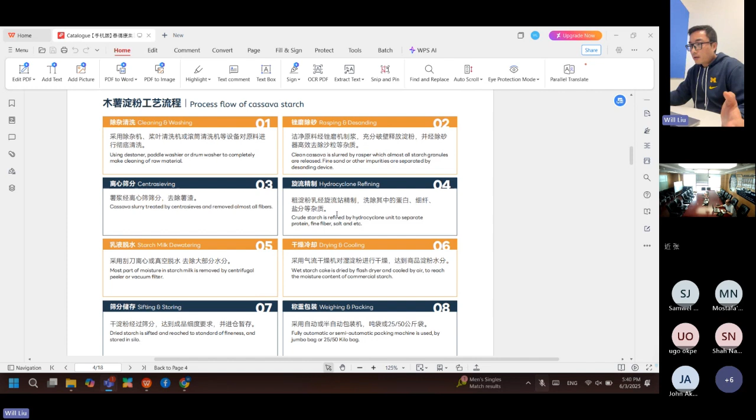and also we are going to go to the crude starch, which is refined by the machine to separate the protein, fine fiber, salt, and all the other elements. We call that the refining process. After that, most of the moisture in the starch milk is removed by step five, including, sorry, vacuum filter.

Sorry, Will. Are you projecting something? Are you showing something on the screen right now? Because we're just seeing a blank screen. Oh, I think it's from you, because I can see what it's showing. Probably you could restart your screen or restart Teams again. Okay, I'll leave and just rejoin, because I'm seeing nothing right now. Okay, sure. You can come back again, and if you've got any issues, we have a backup plan. I have this meeting recorded and am going to share it with the team who joined. I see Lee joined the meeting as well. Hey Lee, welcome. Hi, thank you. So we just kicked off earlier. It's better now, I'm seeing everything. No worries. Thank you.

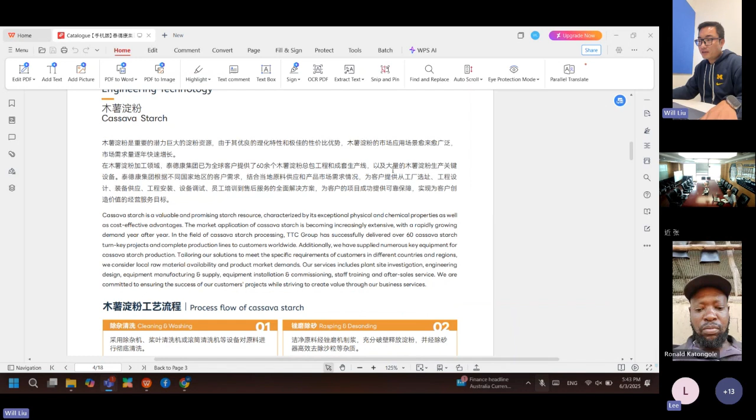All right. So now we go to the processing: cleaning and peel off the skin, remove the fibers, and step 5, most of the moisture in starch milk is removed, and drying and storing and packing. So this is the overall.

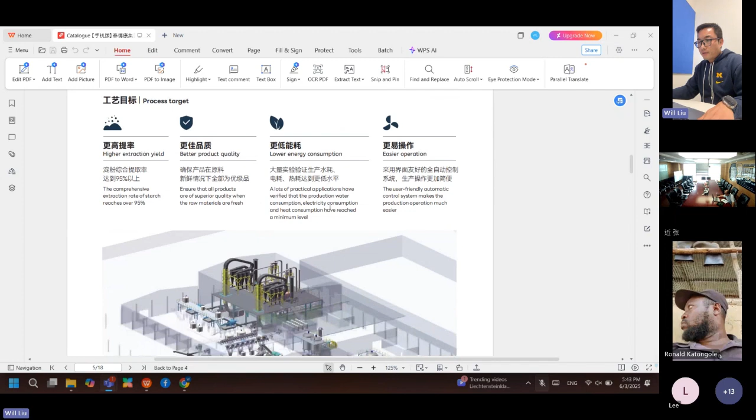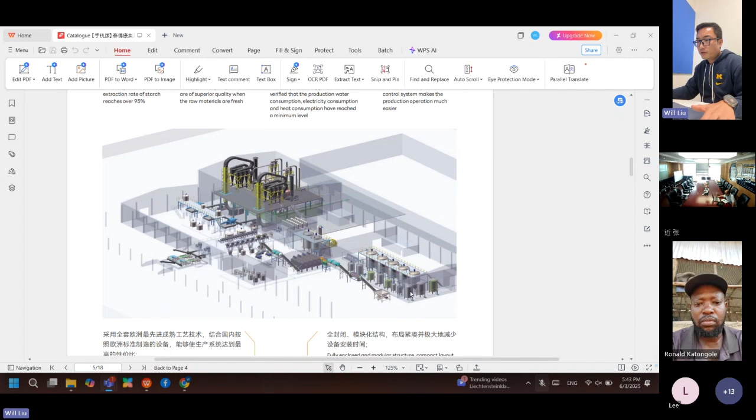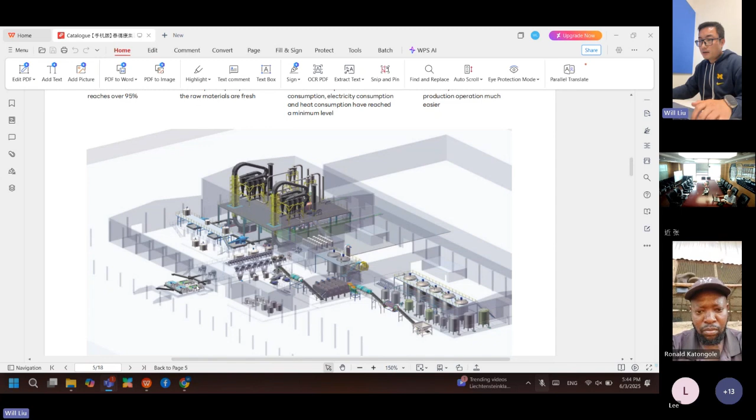If you look at the plant layout, the raw material is coming from here. Let me make it bigger. You see down there, the raw material, fresh cassava, coming here, and it goes to the conveyor to clean and wash them, and it goes through all the different processes. And at the end of the day, packing over here. But you're gonna see the detail. I won't explain detail here.

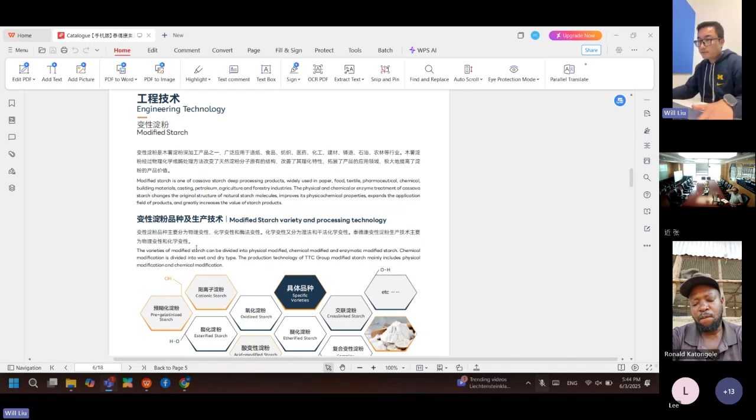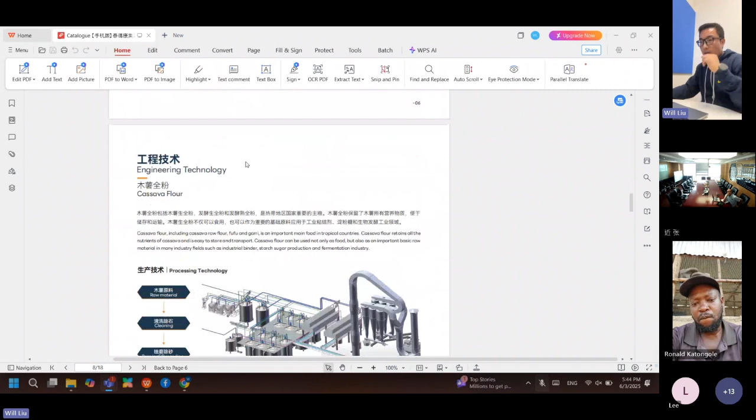So now we go to the next page for modified. This is all the engineering technology for modified starch, and see all the detail there. And this is for the type of starch sugars. Engineering technology. This is for the processing technology. This is for cassava flour, not for starch flour. I won't go through the detail.

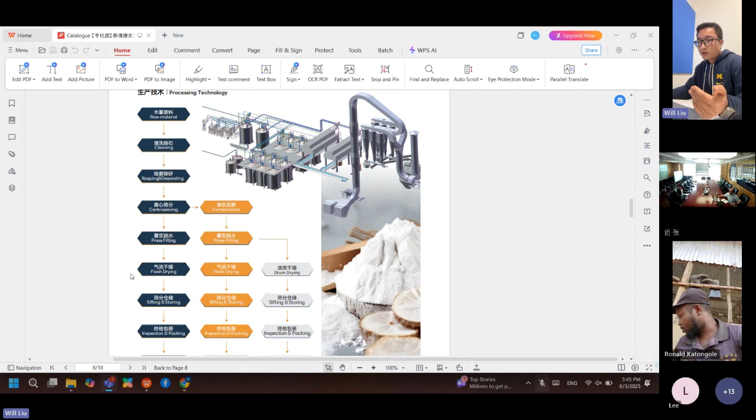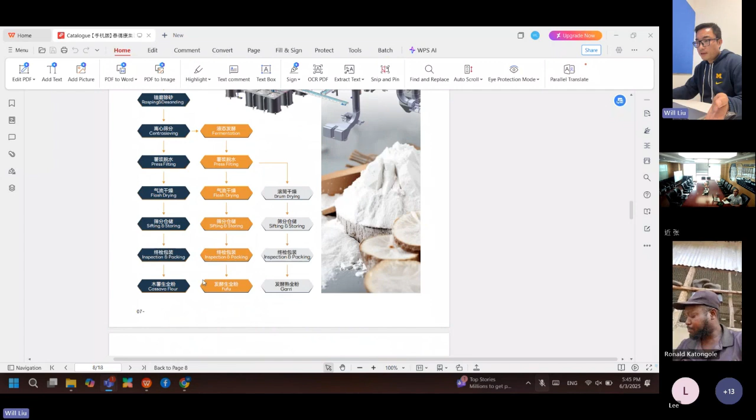I'll go quickly, roughly: raw material cleaning, centrosieving and the press and feeding, remove all the water. Because I think many in Nigeria are manual processing, and here you got all the auto processing, and then here you got to cook as well, called garri and fufu. I don't have a cost for this one. I only have the starch level. We can ask Mr. Tao if you request for the other machinery.

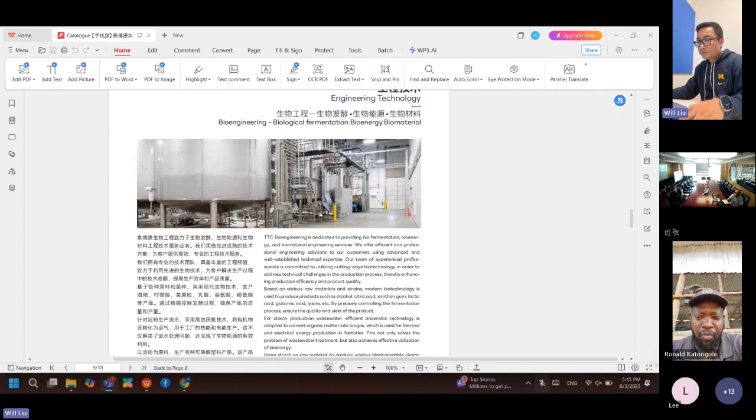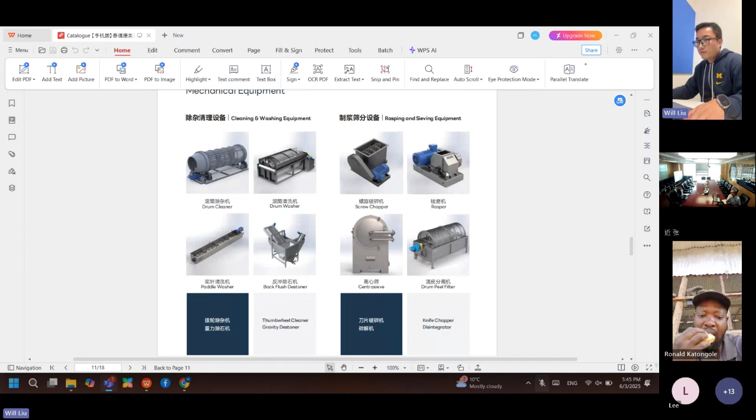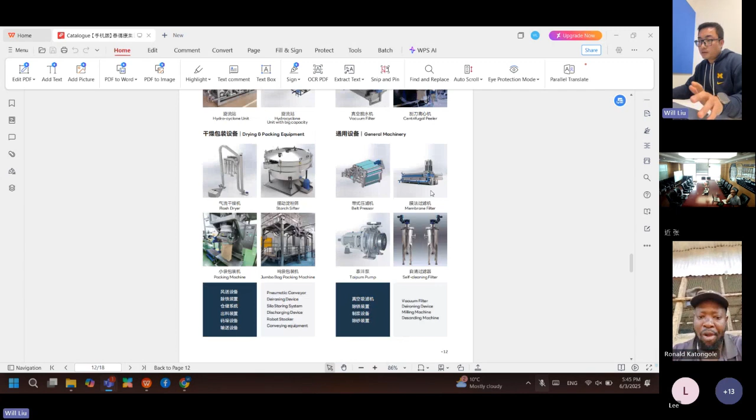So this is the overall, and then you will see all the mechanical equipment over here, how they look: the drum cleaner, drum washer, chopper, rasper, and washer again. That's for the starch. I think if you want to order one, you need all of them. But depending on the size of the machine, the cost might be different. We can capture that in more detail later on.

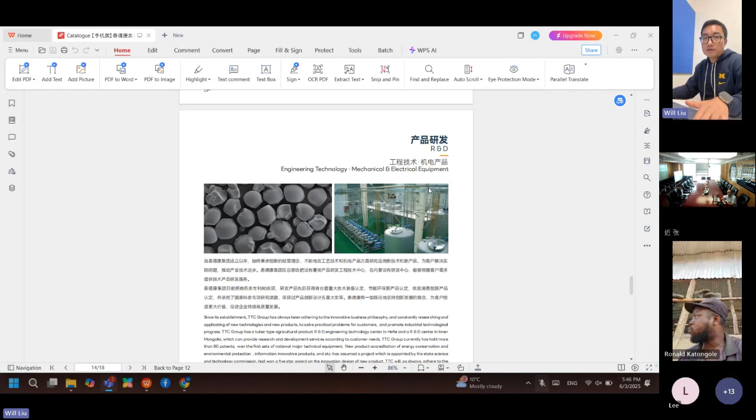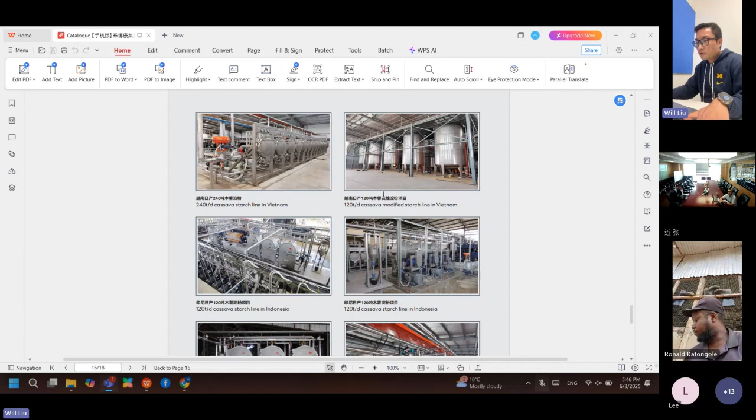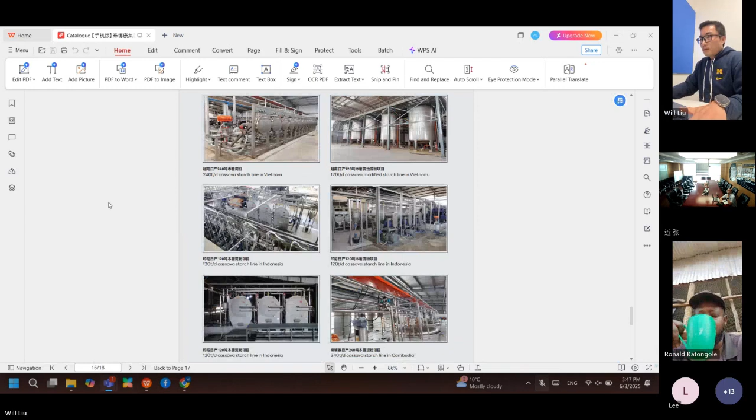All right. So I just roughly went through all the detail. I'll stop sharing and see if the team has any questions before we move to the next step. Hi, Ronald. I just see your video there. Yeah, I'm here. I have a few questions. Yes, please.

So my first question is that most of us in Africa here are at a startup level. When we look at engaging cassava starch, there were many products coming from cassava, like cassava flour, starch, modified starch, starch sugars, and biogas. I've also seen charcoal bricks being made from cassava skins. Very effective burning, they have a high burn rate. So I added cassava skins for charcoal brick making.

But we want to know, from a startup perspective, if we want to engage but still be in the international market, not the local market, what would be the recommended minimum output? That is my first question. So for the starch, what would be the minimum recommended output? And the second question I have is, what would be the space requirement for that output? Because you need to have warehouse space, you need to have land, right?

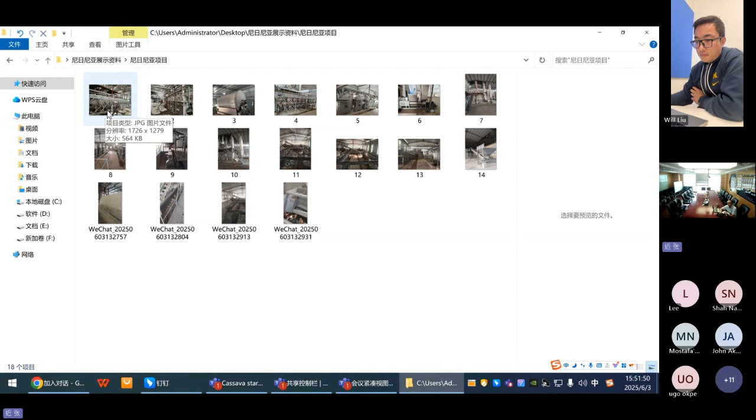So let Mr. Tao share some of his capability and his projects before, and then we could go to the quick Q&A. I wrote down your notes already, so I'll ask the question again once he shares the detail. Okay, hello everyone. Good morning. Let's share some of our projects in Nigeria, some pictures or some video.

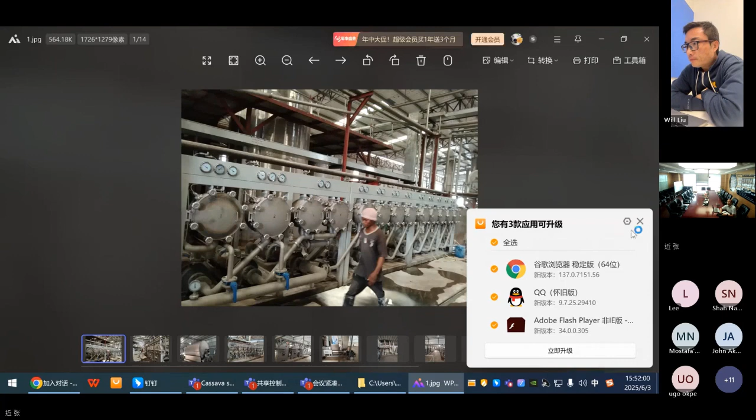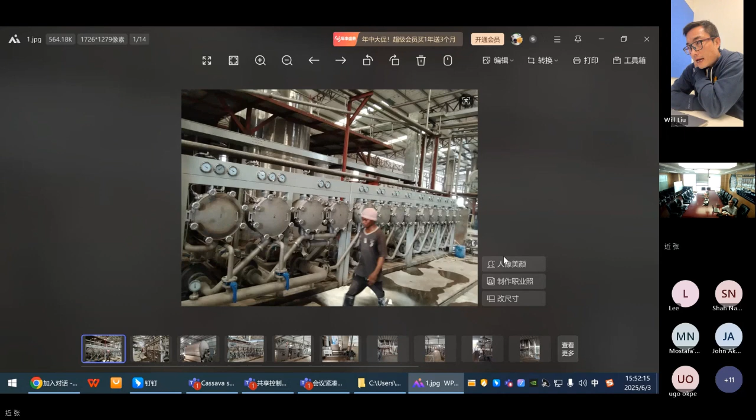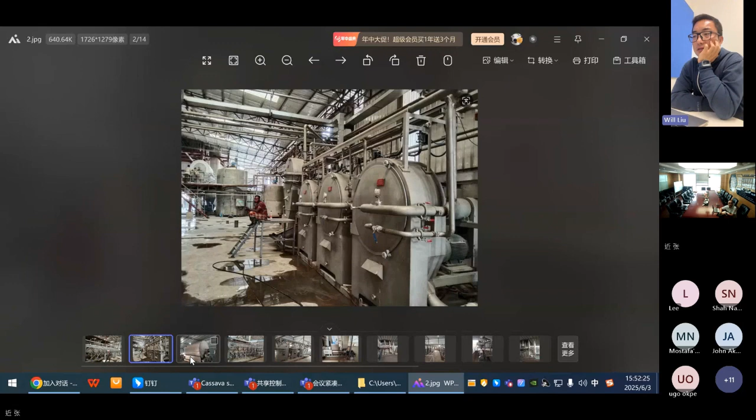This is the project with a capacity of 80 tons per day in Nigeria. 80 tons output or raw material? Is that output? So that's 18 tons? Is this 18 or 80? Not 180. 80 tons. Oh, sorry, apologize. 80 tons, not 18. Okay.

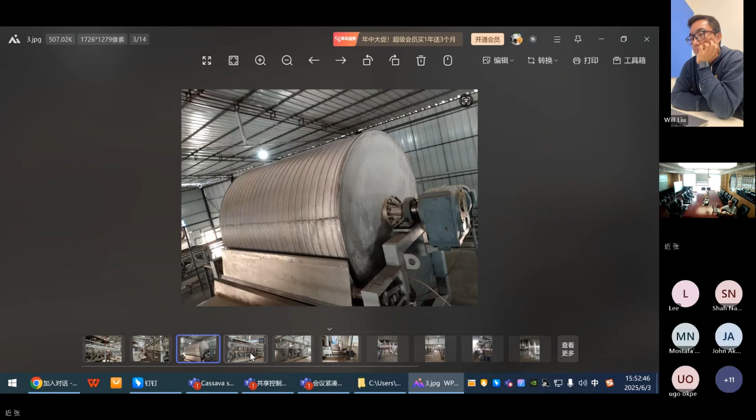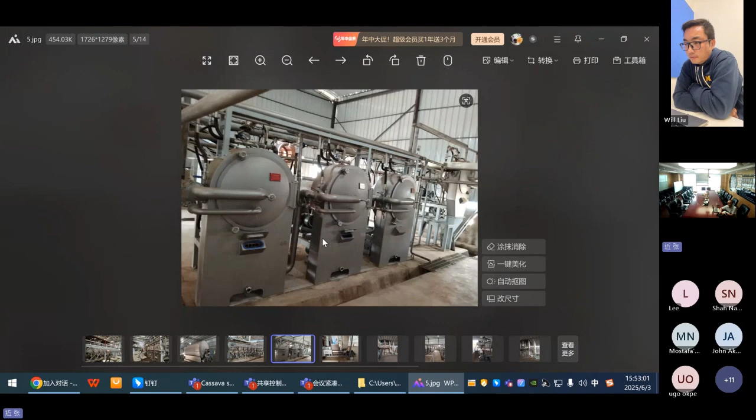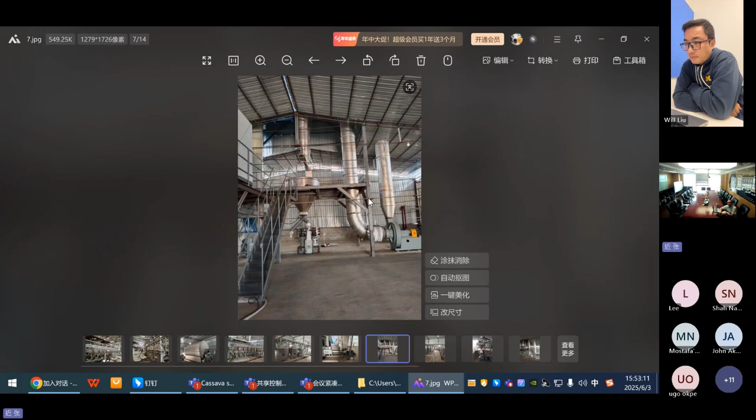So this factory was built by us last year. You can check. This is the key equipment we call the centrifuge. It's used to separate the fiber and the starch. And this is the flash dryer to dry the cassava starch.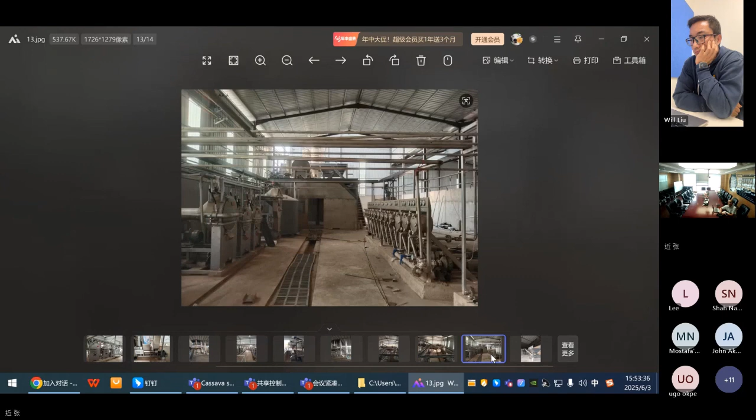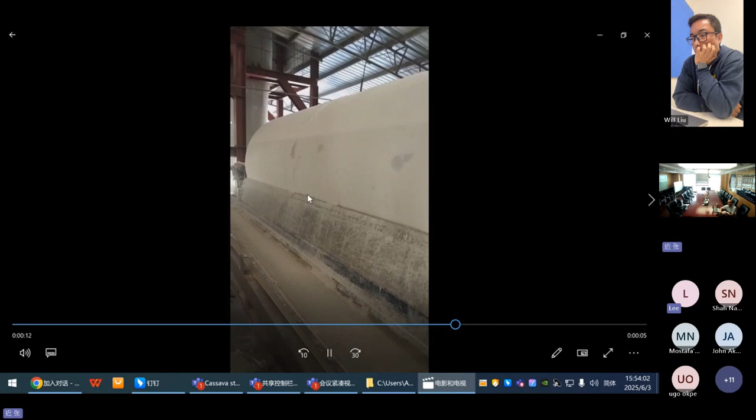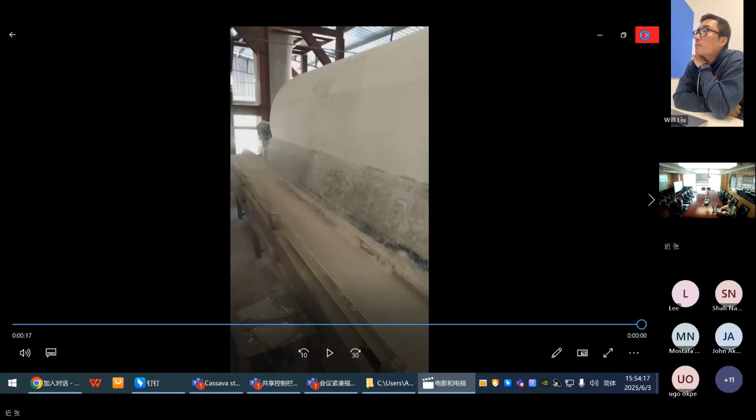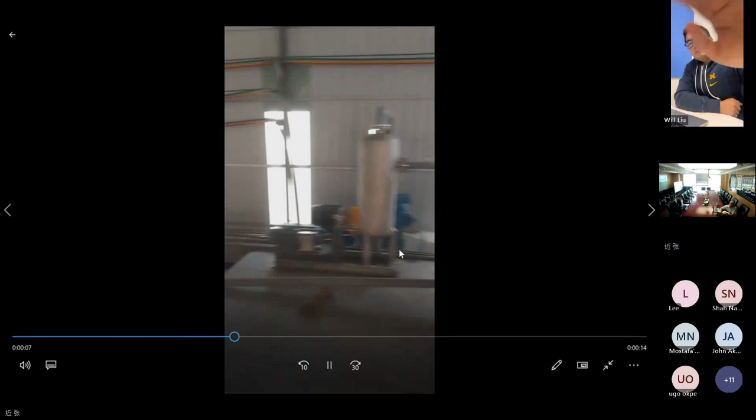Oh, this is some video. Is that the separator? No. This is the machine for dewatering, to reduce the water from the starch. Okay. This is the machine which cleans the raw material of cassava. So this is the whole factory. What's their operation over the starch?

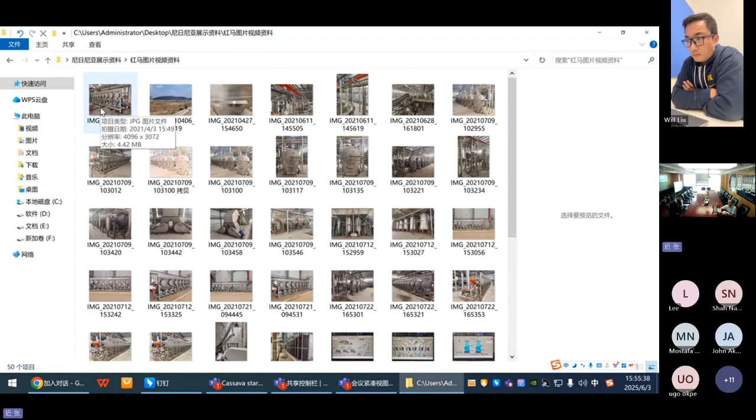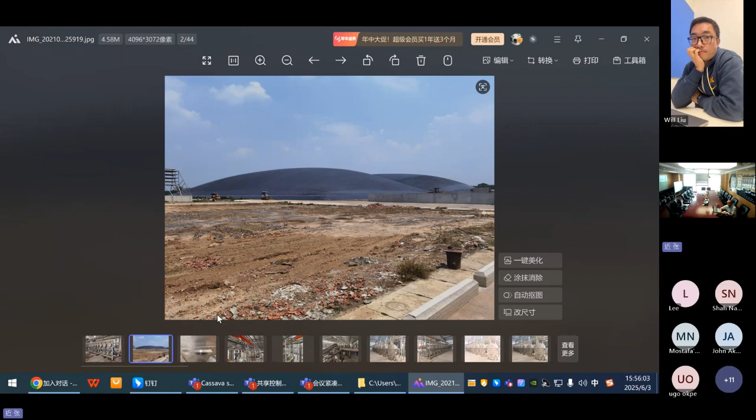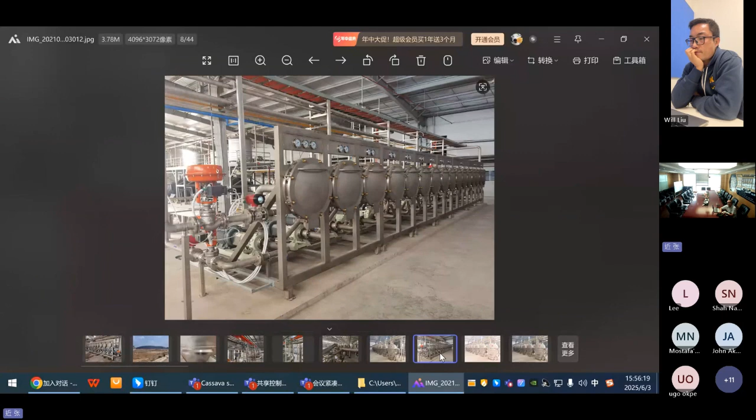Okay. So this is the project in Nigeria, and next I will introduce the cassava starch process line in Vietnam. This is the hydrocyclone, the machine which can separate the protein and the fine fiber from the starch. And this is the biogas, produced through the wastewater. And this process line is combined with the modified starch process line.

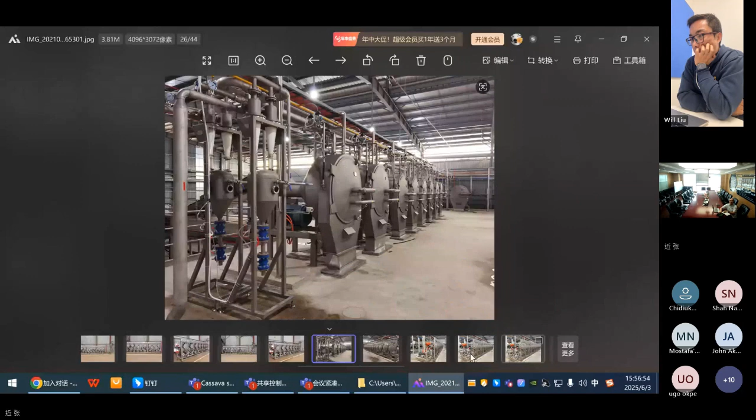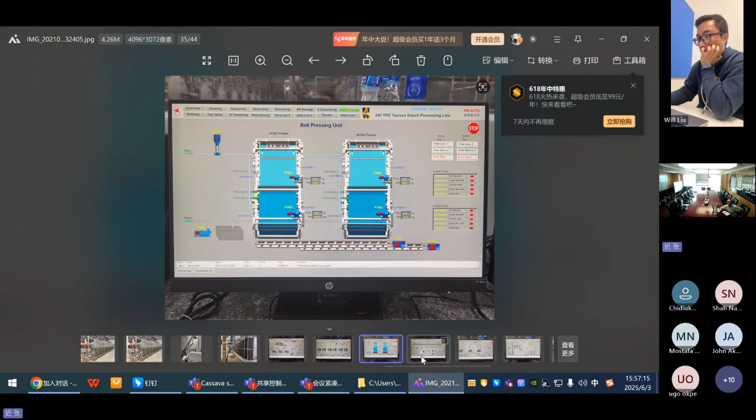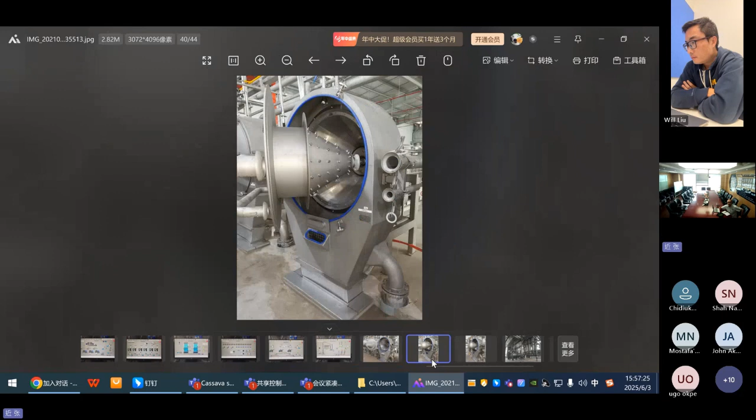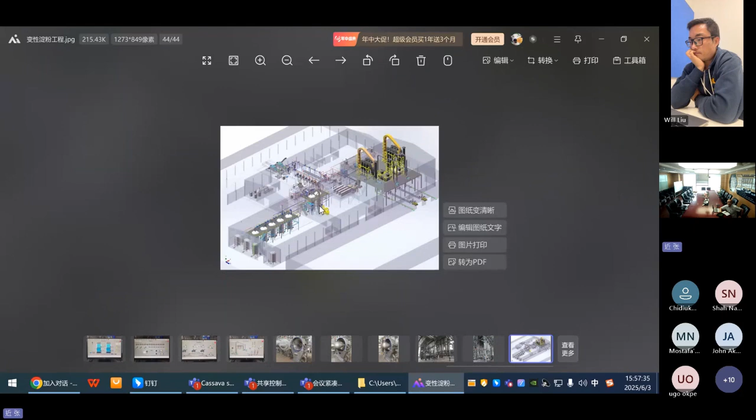I have prepared some documents. So if you all need these documents, I can send them to your email. Yeah, thanks, Mr. Tao. And this is the 3D design. You can see the capacity is 240 tons per day, with 120 tons per day of the modified starch process line.

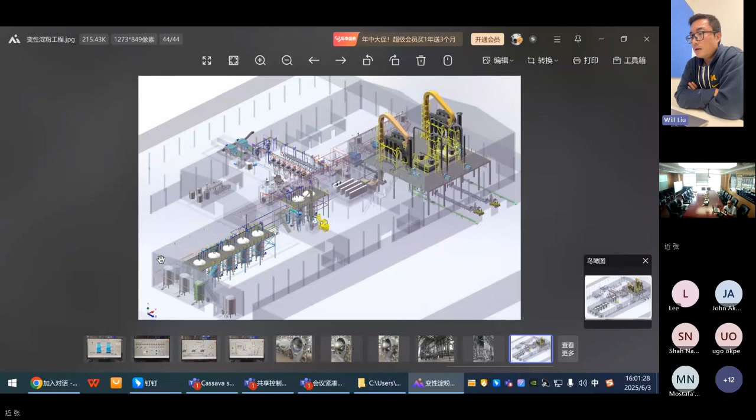That's a cool question. I think adding different... well, you can put a chemical there and modify them, even refine them again to remove more fibers. Let's see if Mr. Cao can further explain at the product level. Maybe Mince is not in the meeting, but he probably can share more detail.

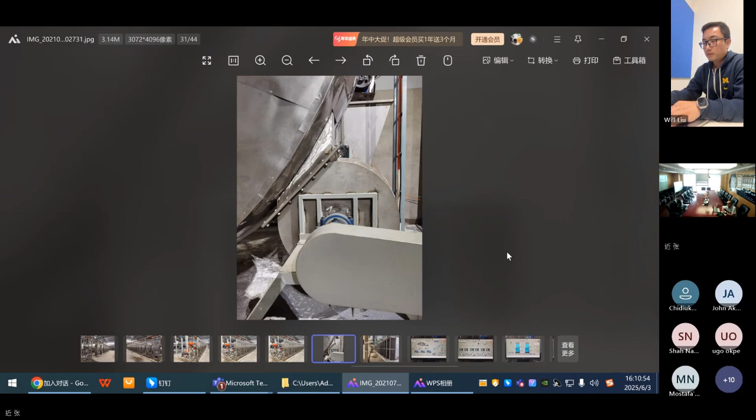This is the 20 to 30, so 1 ton per hour for the whole day, 20 to 30 metric tons per day. The reason is once you start production, you don't want to stop, because that creates more cost. So 1 ton per hour, depending on how many tons you process within an hour, you get 20 to 30 per day. For 20 to 30 metric tons output, the input is about 3.6 multiplied, around 100 metric tons of raw cassava to get 20 to 30 tons of starch. The size of the factory is about 1,000 square meters for the factory only, plus the warehouse, recommended to be 1,000 to 1,200 to store them. If you have quick turnover you might need only 800 square meters, since once produced you might ship the next day and not store for long. But he recommended 1,000 square meters for 20 to 30 ton cassava starch production, with the warehouse about the same size.

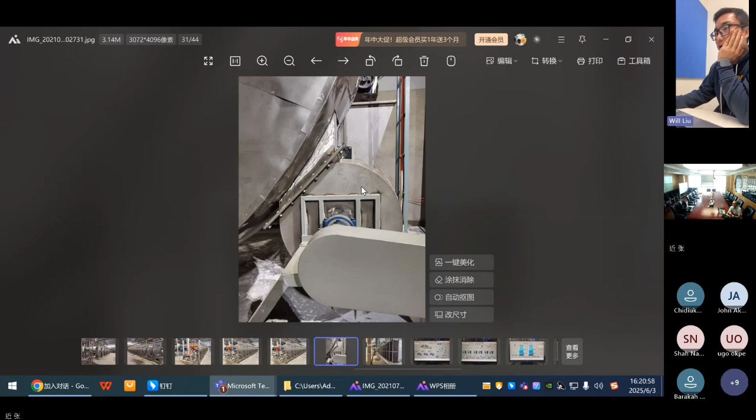So Mr. Tao is trying to say he has another starch processing line doing 5 tons a day. If he wants to convert that to cassava starch at 5 tons a day, it wouldn't even be cheaper than 400, because he'd need to add new equipment and modify the existing process.

Hey Gafa, yes, you have a question? Good morning everybody, thank you very much. Hey, this is William, you're welcome. Thank you very much, this is very enlightening and it will go a very long way in linking OEMs to Nigerian players in the cassava starch industry. Kudos to you, thank you very much for that.

So my first question is, I would like to know what you said for the factory - that 400,000, is that the gross or the net? In terms of, is that just the cost for the factory?

We would like to know what the total cost would be for the factory, including shipping, so we can know the net cost and streamline it down to what byproducts or lines we would want. Do we want the cassava starch line? Do we want the chips line? By breaking that down, we can advise clients setting up cassava starch processing across the 6 geopolitical zones in Nigeria, in terms of import and export costs, moving commodities from farm gates to the processing plant, then exporting. We'll be able to do a cost benefit analysis to see which lines are more productive for our clients. If you can address that issue, I'll appreciate it.

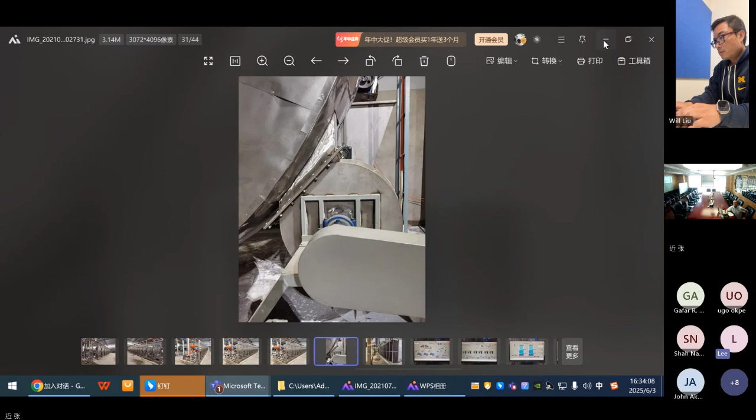Yes, Lee, are you still there? Hi, sorry, can you hear me? Sorry, did you hear me? We can now. Yes, Lee, you're back now.

So my question, did you hear my question? No. Which experts would he expect to find on the ground when he's coming to train for the 2-month period? Which experts should we already have on board in order to operate the machinery correctly? Okay, gotcha. You mean the roles? When the machine and the engineer come here, who locally, like electricians, is going to support the implementation and installation? I think it's really important we have a list.